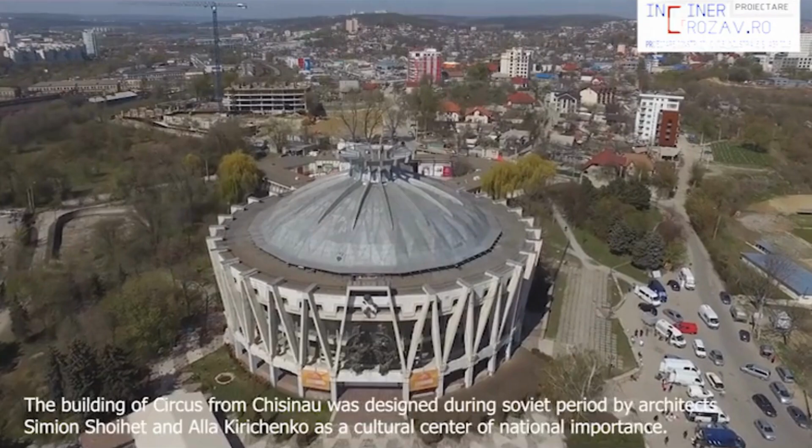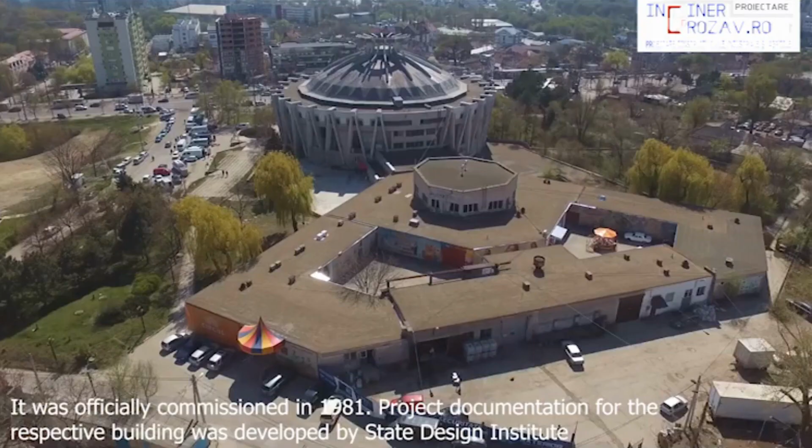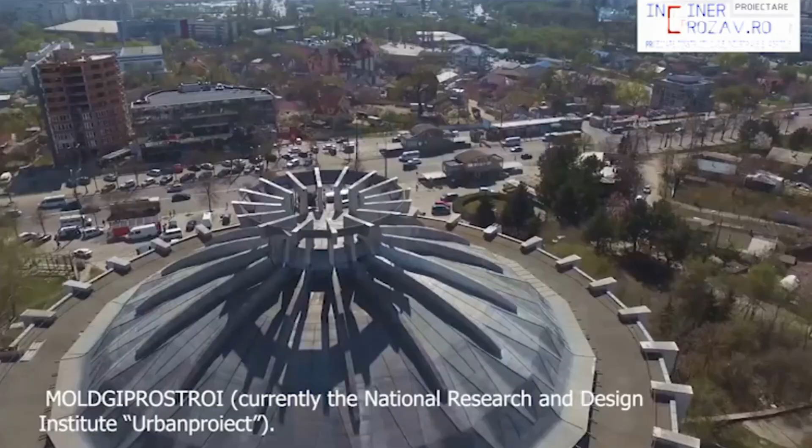The building of Circus from Chisinau was designed during the Soviet period by architects Simion Shoihet and Alla Kirichenko as a cultural center of national importance. It was officially commissioned in 1981. Project documentation was developed by State Design Institute MOLDGIPROSTROI, currently the National Research and Design Institute Urbanproiect. The authors' team was awarded the State Award for Architecture for this project.

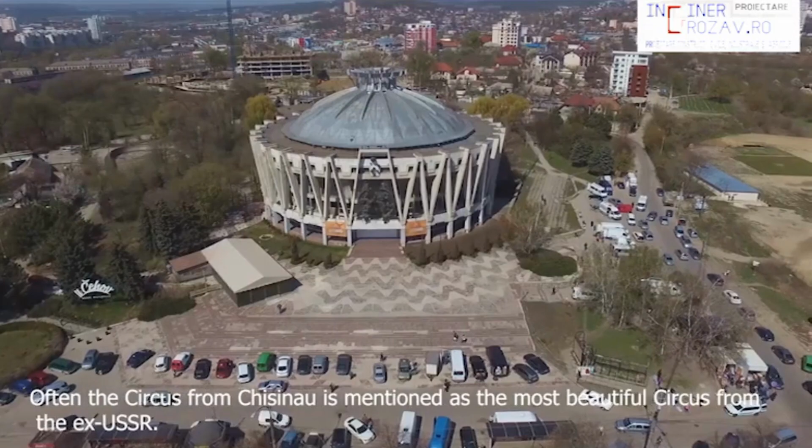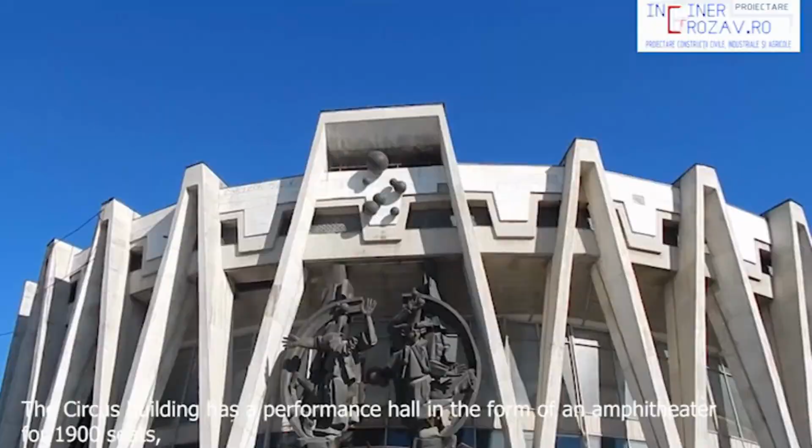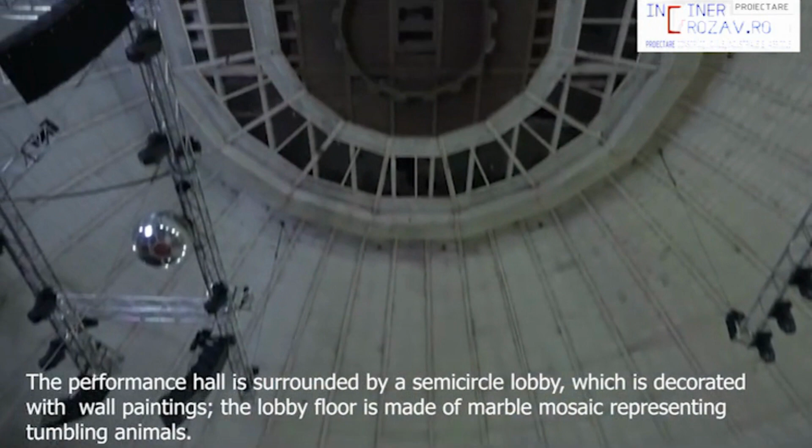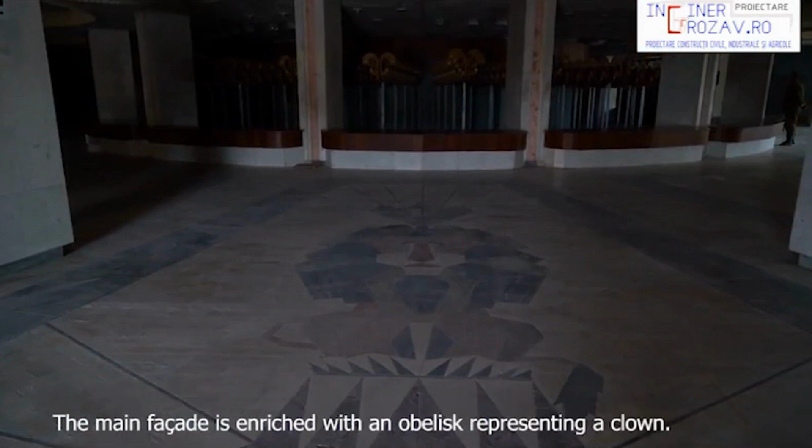Often the circus from Chisinau is mentioned as the most beautiful circus from the ex-USSR. The building has a performance hall in the form of an amphitheater for 1,900 seats, and the central arena is a circle with a diameter of 13 meters. The performance hall is surrounded by a semicircle lobby decorated with wall paintings. The lobby floor is made of marble mosaic representing tumbling animals. The main facade is enriched with an obelisk representing a clown. The row of the columns from the facade symbolizes the traditional Moldavian dance hora.

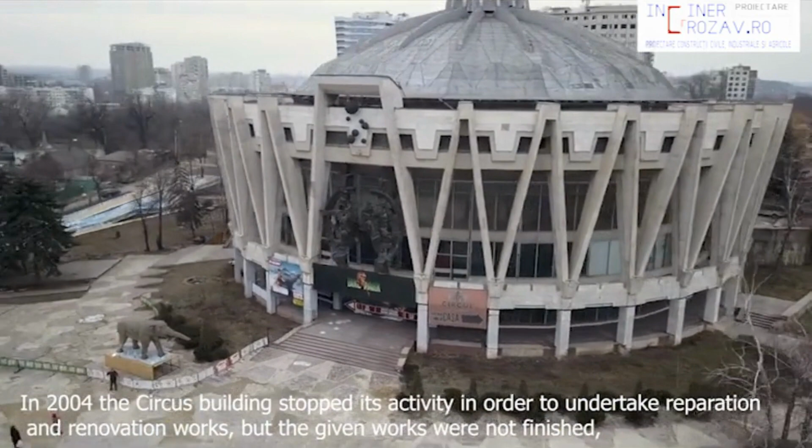In 2004, the circus building stopped its activity in order to undertake reparation and renovation works. But the given works were not finished, hence the building is not yet operational.

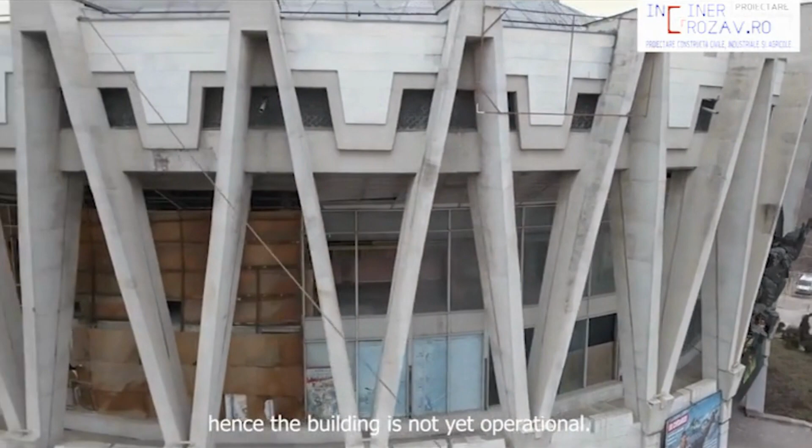The objective of this assignment is to perform the screening of the technical conditions of the circus building and to submit an expertise report regarding the possibility to further operate these premises.

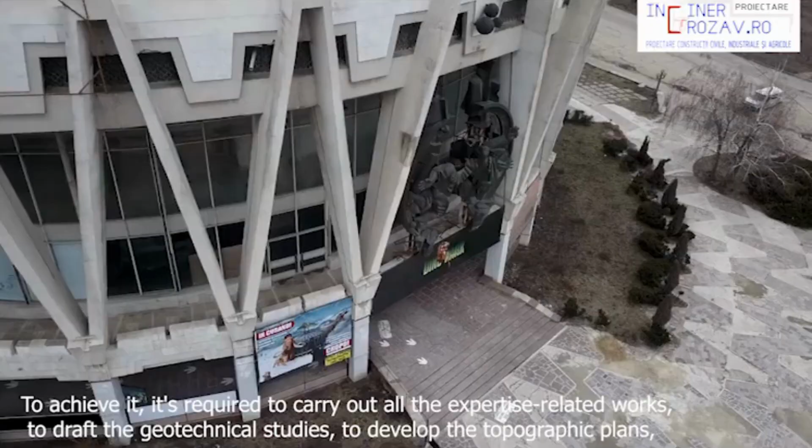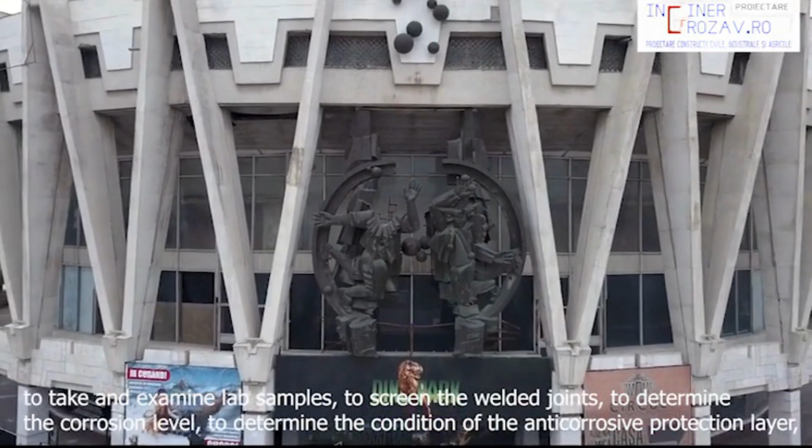To achieve it, it's required to carry out all the expertise-related works: to draft the geotechnical studies, to develop the topographic plans, to take and examine lab samples, to screen the welded joints, to determine the corrosion level, to determine the condition of the anti-corrosive protection layer, and to determine the bearing capacity of the resistance structure elements.

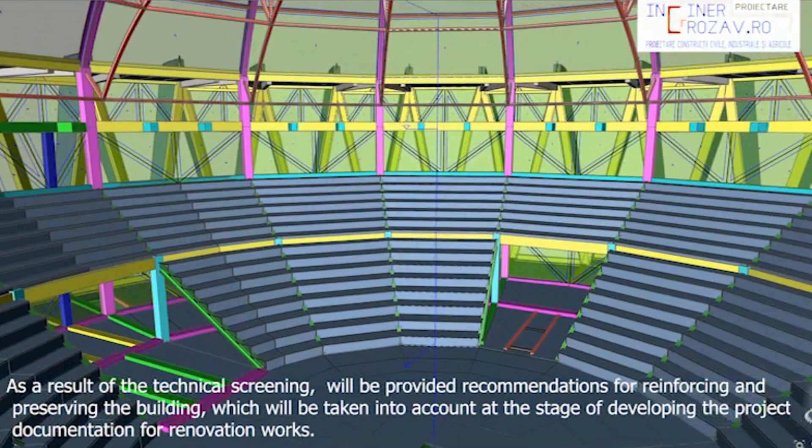As a result of the technical screening, recommendations will be provided for reinforcing and preserving the building, which will be taken into account at the stage of developing the project documentation for renovation works.

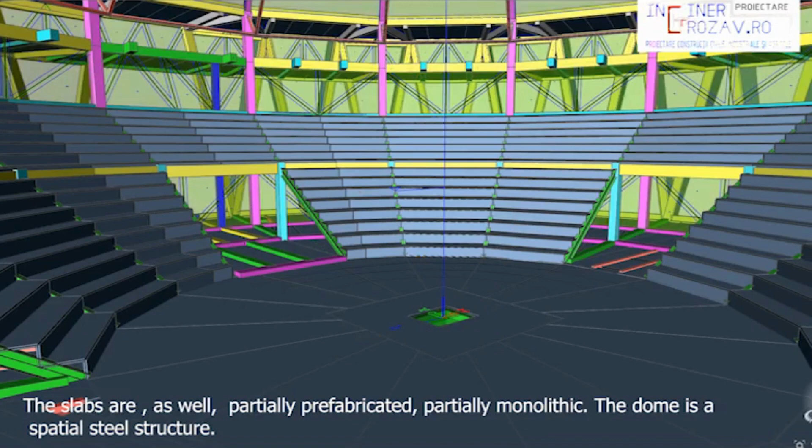The skeletal building was designed from radial monolithic reinforced concrete frames and circular beams, partially prefabricated, partially monolithic, that lean on them. The slabs are as well partially prefabricated and partially monolithic. And the dome is a spatial steel structure.

As the country is in the middle of implementation of Eurocodes, during the expertise work it appeared necessary to perform an alternative calculation of the structure using these design codes.

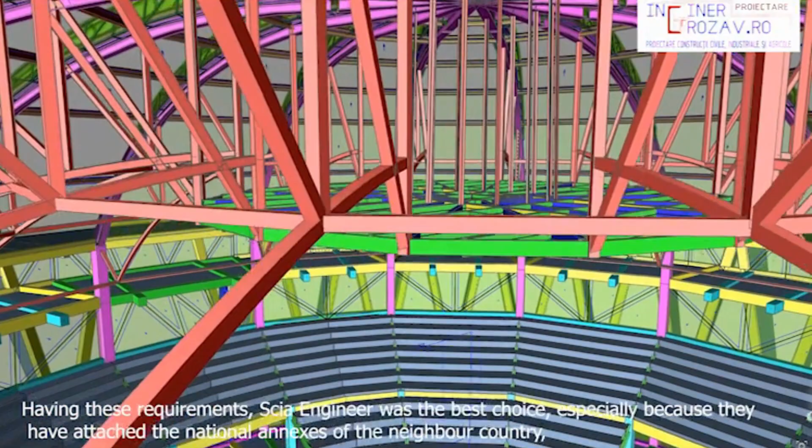Having these requirements, Scia Engineer was the best choice, especially because they have attached the national annexes of the neighboring country, so we could perform the calculation using the seismic spectrums from the localities close to the placement of our structure.

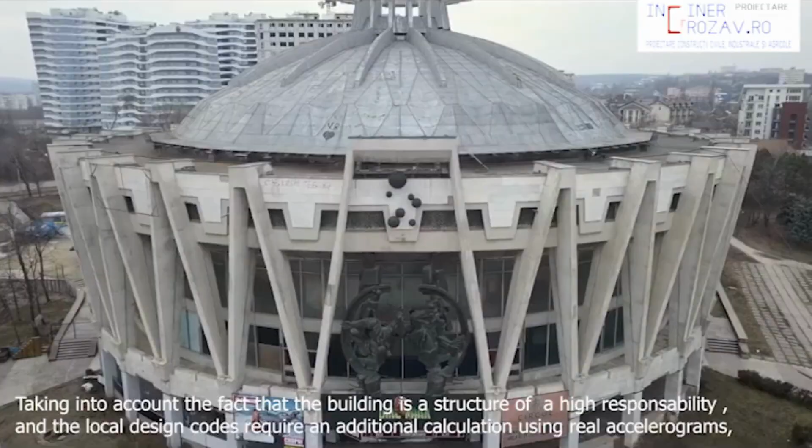Taking into account that the building is a structure of higher responsibility, and the local design codes require an additional calculation using real accelerograms, we generated 3 response spectrums, respectively for vertical, horizontal, and tangential accelerograms. Later we used the Scia feature of introducing personalized spectrums, so eventually it was possible to calculate the building as close as possible to the real seismic load.

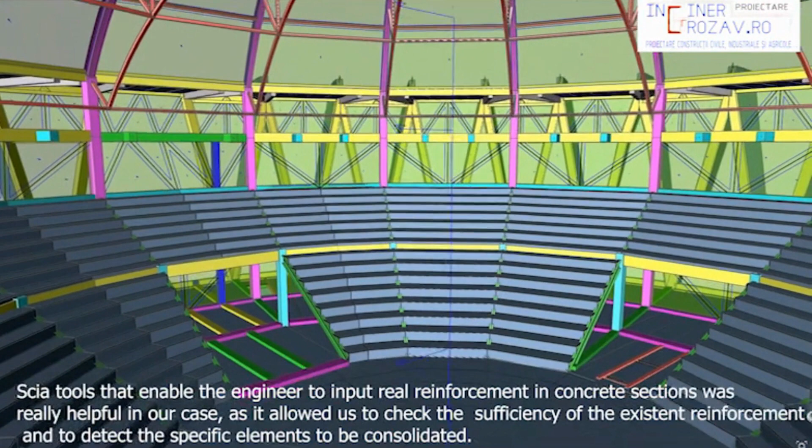Scia tools that enable the engineer to input real reinforcement in concrete sections were really helpful in our case, as it allowed us to check the sufficiency of the existing reinforcement and to detect the specific elements to be consolidated.

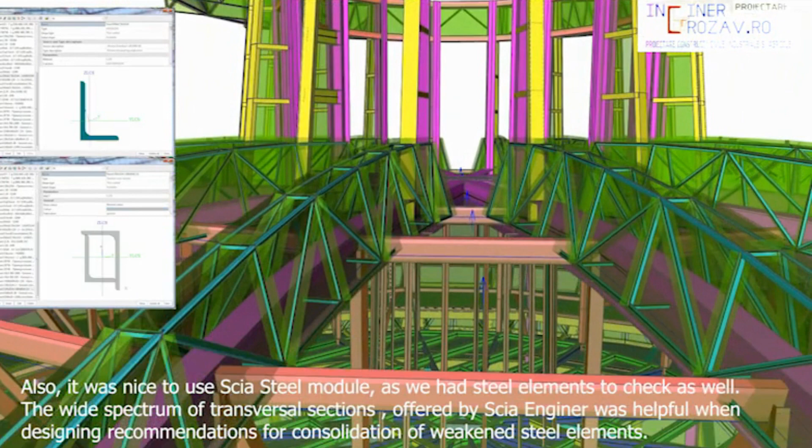Also, it was nice to use the Scia steel module, as we had steel elements to check as well. The wide spectrum of transversal sections offered by Scia Engineer was helpful when designing recommendations for consolidation of weakened steel elements.

Using the modulation of elastic medium, we were able to model the interaction between soils and structure and to check the foundation. I think that reusing is an important aspect of protecting our cultural and architectural heritage.

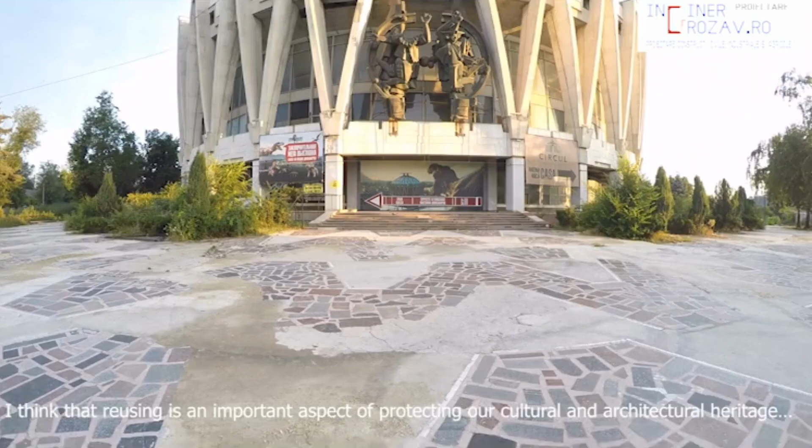Restoration of our old buildings is profitable for all of us. It allows present and future generations to take advantage of the achievements of past generations. Unfortunately, in the present progressive world that relies mostly on advanced technologies, these buildings acquire cultural significance only if they are under threat or almost totally lost to the country.

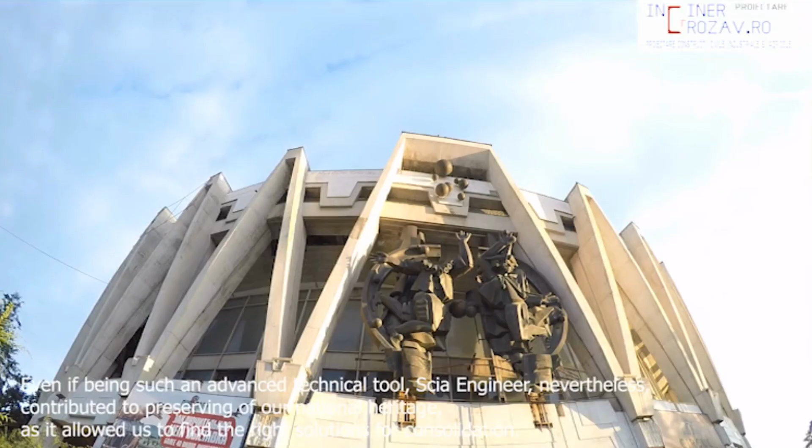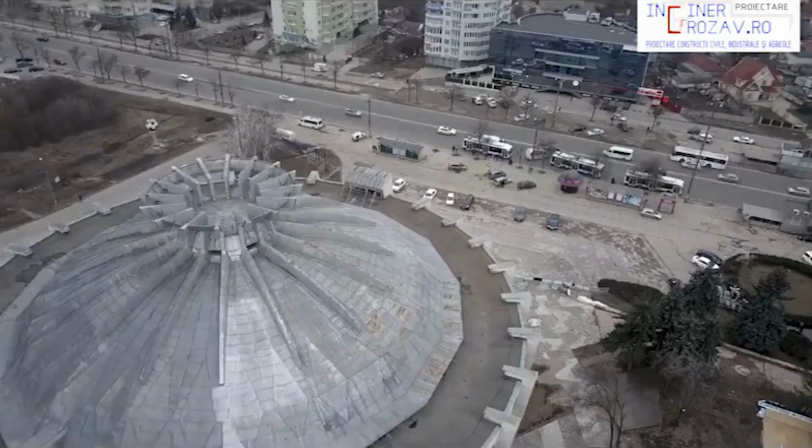Even though it's such an advanced technical tool, Scia Engineer nevertheless contributed to preserving our national heritage, as it allowed us to find the right solutions for consolidation.

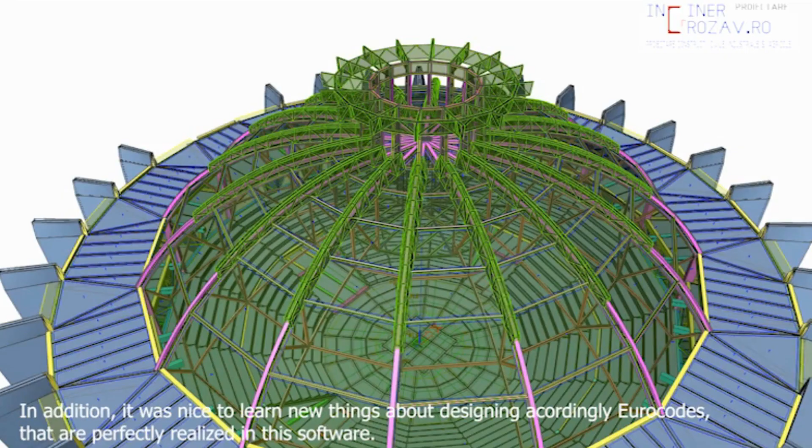For me, participation in the structural calculation of the Circus building was a great experience. First of all, using Scia Engineer, I discovered aspects of modeling that were new for me. The software itself provides a set of tools that enable the engineer to model the structure as close to reality as possible. In addition, it was nice to learn new things about designing according to Eurocodes that are perfectly realized in this software.

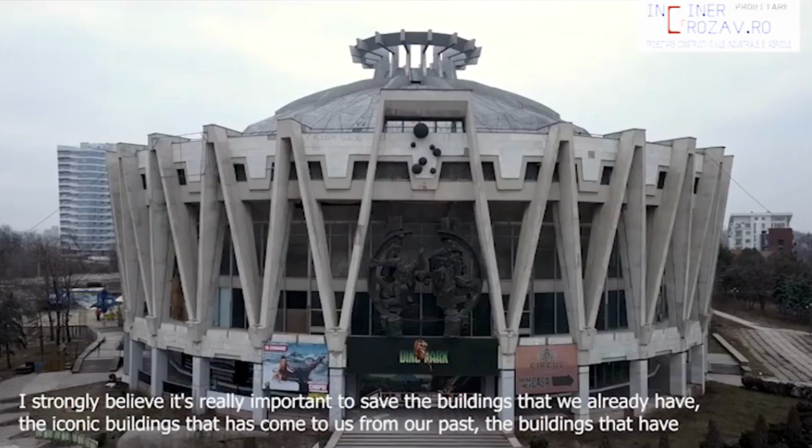Secondly, I was glad to contribute to the preservation of our national architectural heritage. I strongly believe it's really important to save the buildings that we already have, the iconic buildings that have come to us from our past, the buildings that have their own special aesthetic and uniqueness. It's important for us, for our self-knowledge, for the continuum of generations, for keeping the beauty of our past.